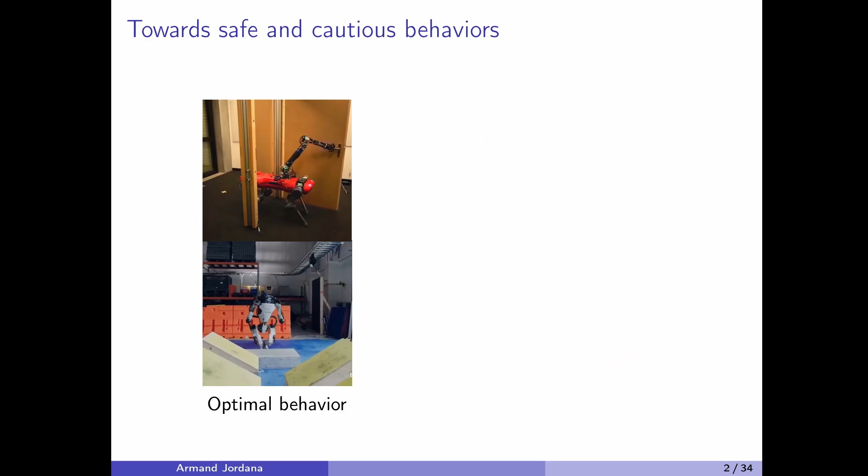In the past years, we have seen a lot of progress in robotics with our famous videos of the ANYmal robot at ETH opening a door, Atlas performing parkour. I think we can safely say that we are able to achieve optimal behaviors on a robot.

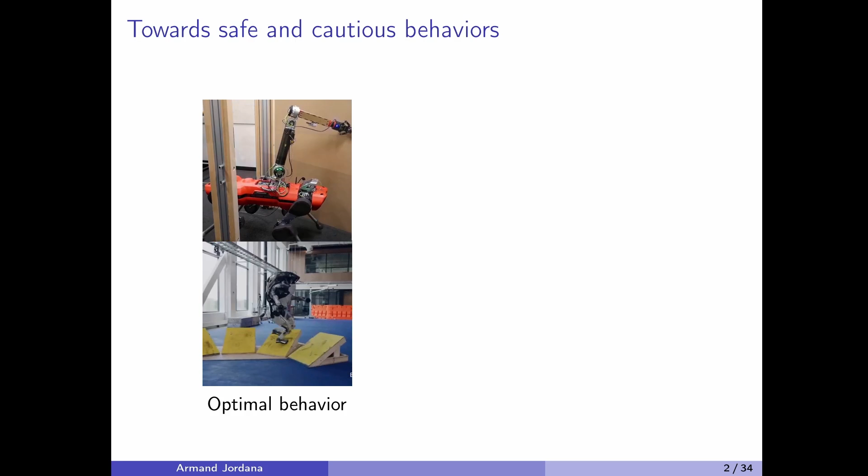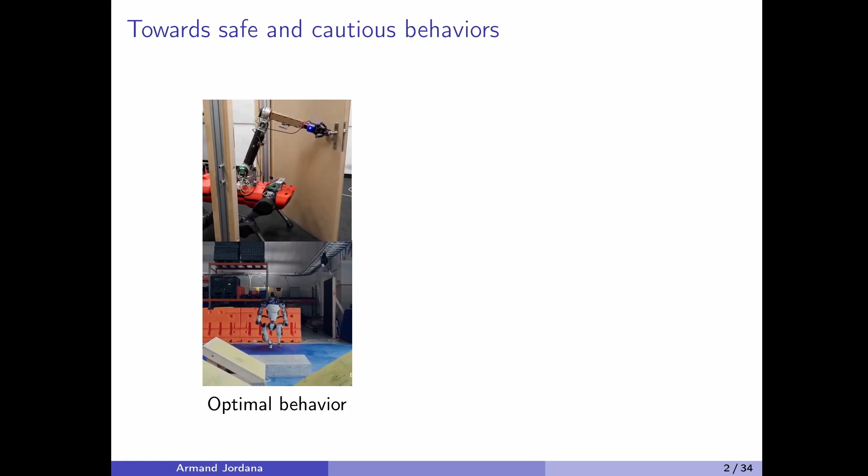And yet, this is mostly confined to predefined settings, such as factories or labs, as you can see in those videos. And I think one of the reasons why we're not seeing this outside in the real world doing useful things yet is that we are not able to achieve safe and cautious behaviors.

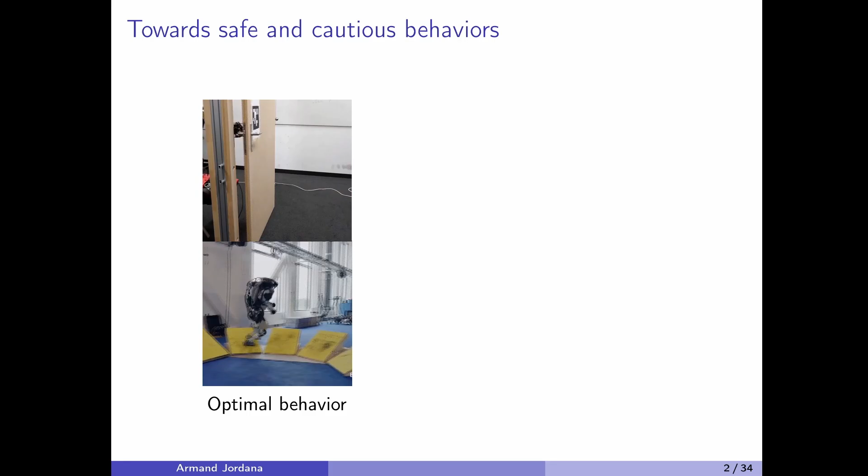And when you think about it, generating algorithms that can automatically adapt the speed or the motion according to the uncertainty and the risk is really a complicated problem. And that's what I studied during my PhD. Today I will show a few ways in which we can make progress in that direction.

So first, let's take a look at which controller is running under the hood of those nice videos that I showed you. Both of those videos are running with MPC, which stands for Model Predictive Control. The idea of MPC is quite simple: we are going to constantly replan in real time over a predictive horizon.

So if you think of this little toy robot that wants to go from its initial state to the goal, what it's going to do is very simple: it's going to plan one path from the initial state to the goal. And if something goes wrong—let's say it starts going through that path and a disturbance hits the robot—it's going to be pushed away to a new state, and MPC automatically replans a new trajectory to reach that goal.

And so what's very nice is that this new path is not necessarily the same one as the previous one. It's very versatile. You can find the new optimal thing in some sense. This is what makes MPC that versatile and effective in practice.

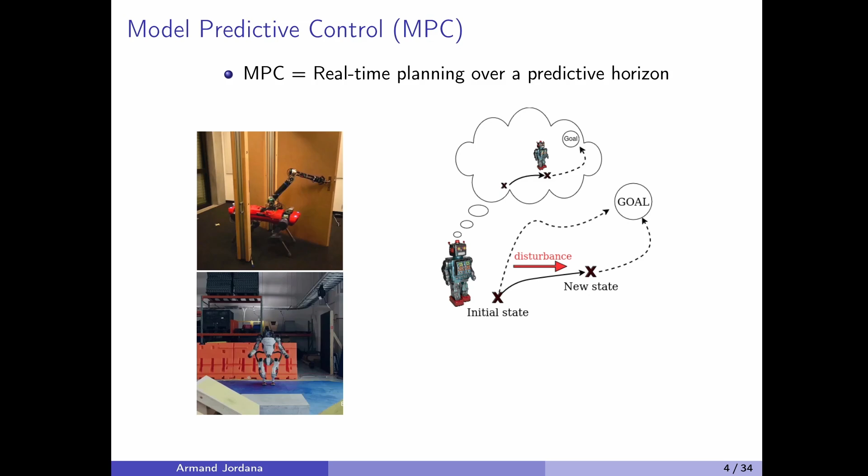However, there's a drawback: planning online is very computationally expensive, and so in practice we have to do a lot of simplifications. Usually we are going to ignore safety to save compute time, and we ignore any notion of risk and uncertainty.

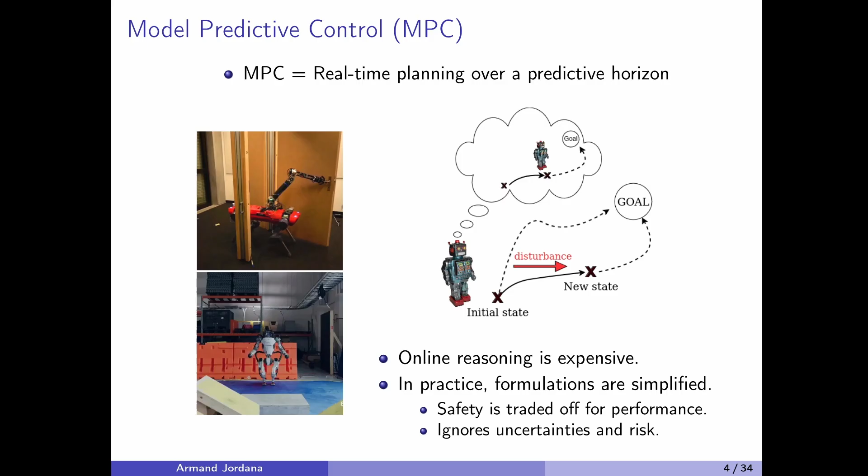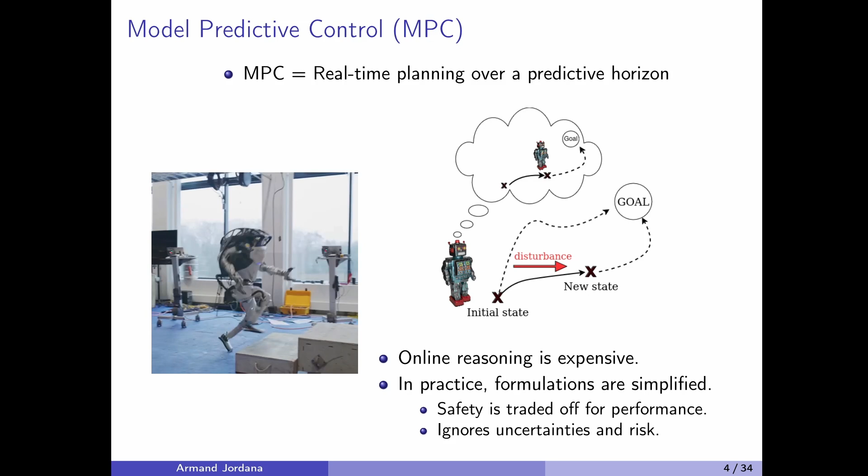So this can lead to catastrophic results. For instance, this is a famous one from Atlas where it tries to do some fancy motion and misses a step. Here, clearly, there was some uncertainty in the perception loop, and it was completely ignored by the controller, and this led to this catastrophic result.

So the question is, how can we go further? How can we bridge this gap and ensure safety while reasoning about the notion of risk?

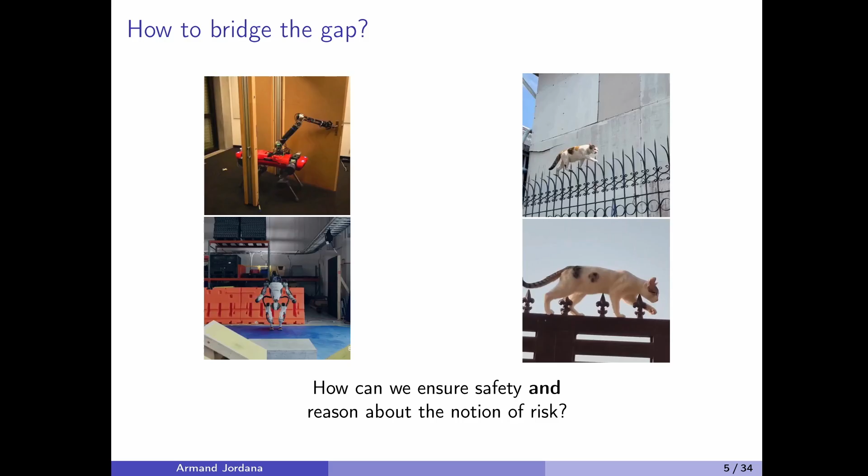Okay, so I said that this toy robot had to plan a path to reach that goal. What I meant actually is that we're going to solve an optimal control problem. This is how you formalize it: you have a state X, which in our case is the joint position of all the robot and the velocity of each joint. And then we have a control input, which is typically the torque that we apply in each of our joints. So the goal here is to minimize our cost function that's defined over a predictive horizon.

So here L is the cost function, and capital T is the time horizon.

So that's how far the robot can see into the future. This minimization of our cost is done subject to two constraints: the first stating that we should start from where we are at the initial time, and the second stating that we should satisfy the dynamics of the robot, which is nothing but the second law of Newton.

This problem is very challenging to solve because in practice, we only have 1 or 2 milliseconds to make a decision. And if we don't have an answer in a few milliseconds, then the robot falls. So it's quite difficult, especially that this problem is completely non-convex and highly dimensional.

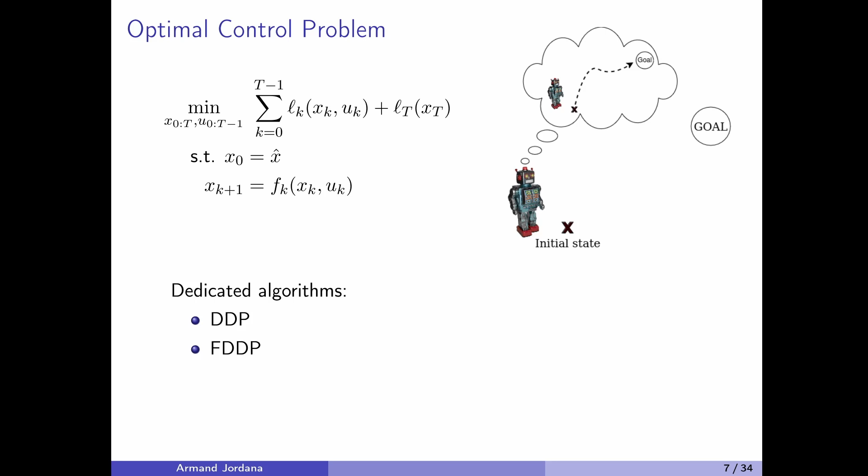In practice, practitioners in robotics have come up with very tailored algorithms such as DDP or FDDP, which is a variation of DDP. DDP stands for differential dynamic programming. This has been quite effective in recent years.

One question I asked myself during my PhD is why not use standard optimization techniques? Because in the end, this is nothing but an optimization problem. So maybe we could use Newton's method, or here, because we have constraints, some sequential quadratic programming - some really textbook techniques.

The first answer I found in the literature is that if you do dedicated algorithms, you will have a linear complexity with respect to the time horizon, while with standard optimization algorithms you can have up to a cubic complexity with respect to the time horizon. This is really something we cannot afford when we want to find a solution in a few milliseconds.

However, this is not entirely true. It's actually possible to find solutions with a linear complexity. And what I will argue today is that this has been slightly overlooked by the robotics community. It was actually well known in the control community for a very long time, but I think roboticists have slightly missed this, and I will show you how by just following standard optimization techniques we can have state-of-the-art results in robotics.

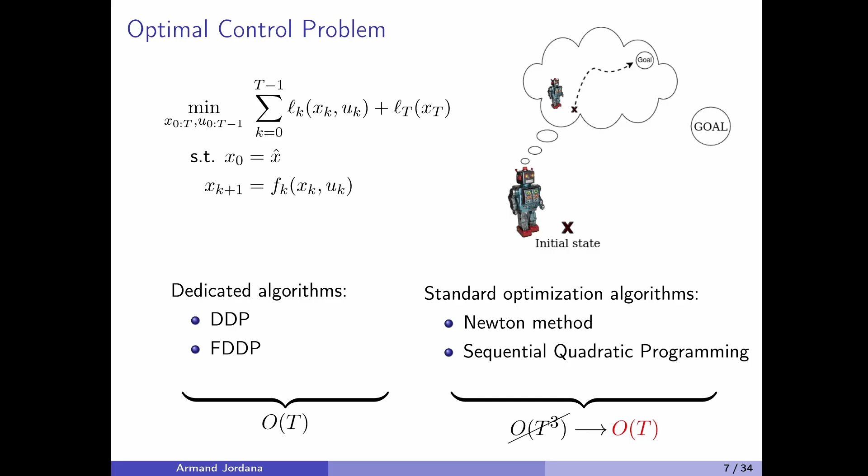Okay, so let's dive in with SQP, but we could take any other textbook technique. SQP is really a standard optimization technique to handle constrained problems. The procedure is quite simple: we are going to iteratively quadratize the cost, linearize our constraints.

Here, it's going to be the dynamics. Then we are going to solve an associated quadratic program and use the solution of this QP to take a step according to a line search procedure, for instance. So here, the challenge for us is really to solve the QP. It has a huge dimension, and this is really the compute bottleneck.

So fortunately, we are very lucky in robotics - we only have optimal control problems to solve, and they all have a very nice structure. If we look at the KKT conditions of our QP, there are a lot of zeros. It's actually a tridiagonal system that we want to solve.

And so, well, this is very simple to solve efficiently. We can just do some recursions with a Gaussian elimination, and this gives us a nice linear complexity. Actually, if you write down the equations, you can recover Riccati recursions, and this is how you can connect SQPs to all the other algorithms such as DDP. So in the end, we can implement standard optimization algorithms with really the same equations as DDP-like techniques.

Again, this was known in the control community, but not really applied in robotics. So what we did was to benchmark and see what worked best. Here you can see a nice motion with a humanoid robot, and we compare DDP and its variations against SQP.

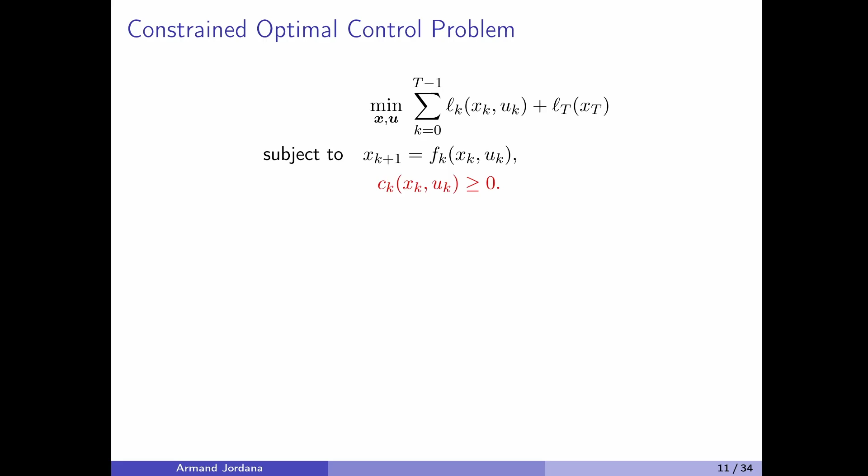However, when you come with optimization principles, adding constraints is very straightforward. You can just apply the same recipe, have an SQP, except that now you are going to have an inequality quadratic program to solve. So there is nothing new, except that the QP has inequalities, but this is something that we know how to do.

You can, for instance, use OSQP or any other state-of-the-art QP solver. In our recent work, we found a way to exploit the sparsity inside OSQP. If we look at the equations, we have the same sparsity pattern, so we can leverage it to get linear recursions and get an implementation of OSQP that's linear with respect to the time horizon.

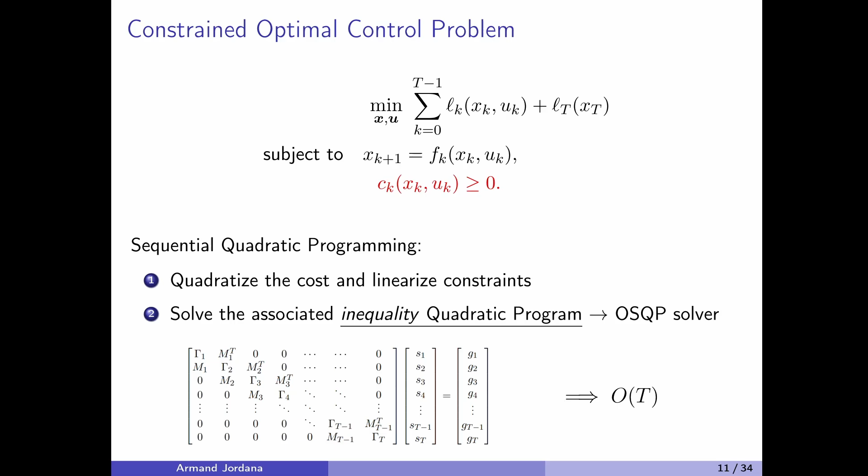If we know the sparsity in advance, we're going to do much better than the default sparse linear algebra of OSQP here. All right, so we have released an open source implementation, and since we have used this work in many other projects, I will show you just a few examples.

So here, it's a KUKA robot with 7 degrees of freedom performing a sanding task. It's basically drawing a circle while applying 50 Newton on the table.

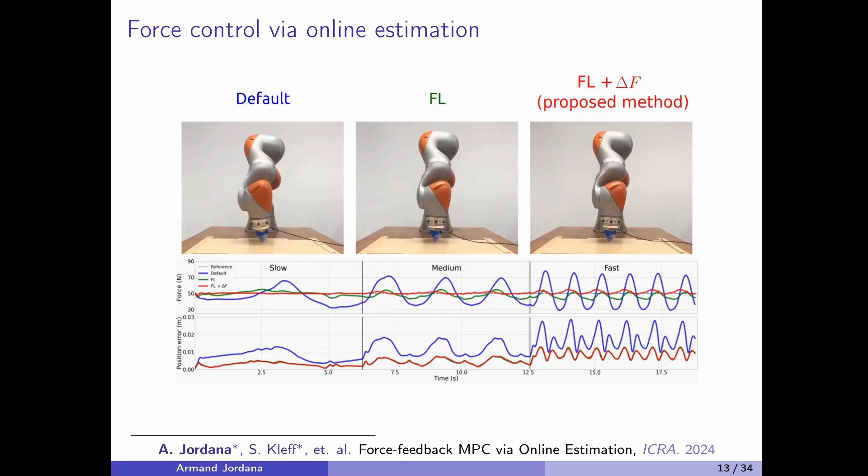So here those are various techniques. The point that we wanted to illustrate in this paper was that MPC typically struggles in a force control task. So here what you will see is my colleague pushing the robot during the motion. The first plot shows the force, and pay attention to the force tracking.

You can see that it should be at 50 Newton, but each time my colleague pushes the robot, it deviates a lot from the static reference. This is a well-known problem from MPC. It's basically due to the fact that we don't integrate the force in the state.

So here we propose a very simple way to circumvent this problem by doing some online estimation, nothing different than Kalman filtering. As you can see, now each time my colleague pushes the robot, we're able to match the 50 Newton reference in force.

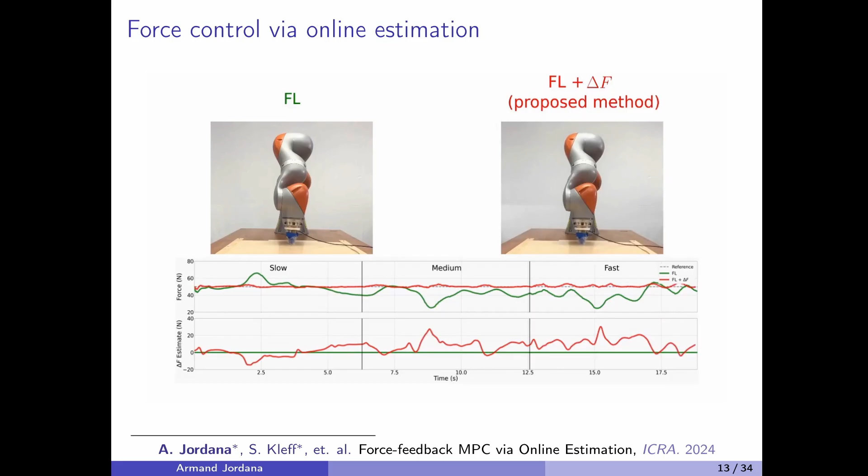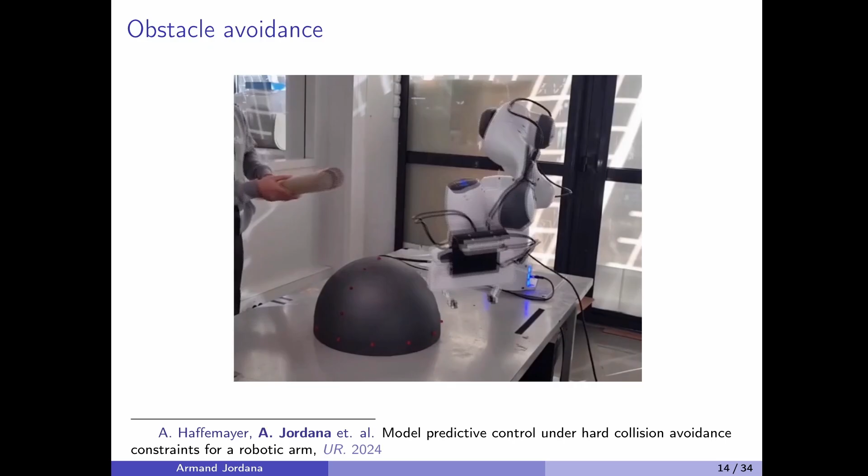Okay, so that's one example of application. Here's a second example of application that was performed here at LAAS. This is a Panda robot that has to avoid this spherical obstacle.

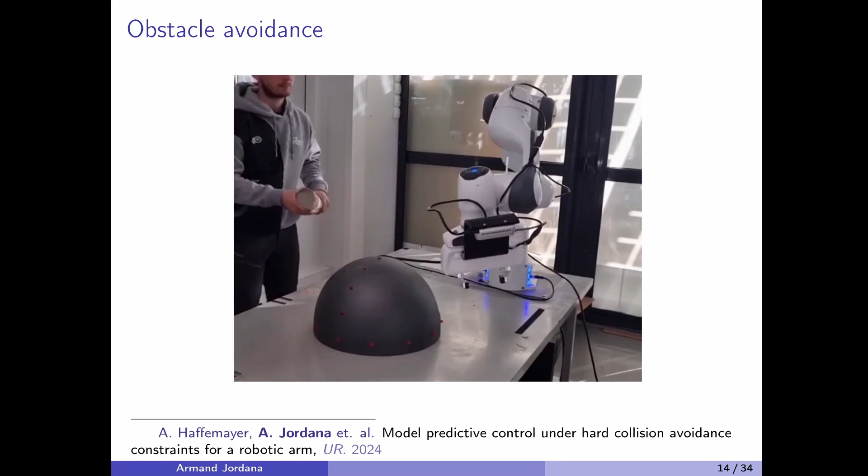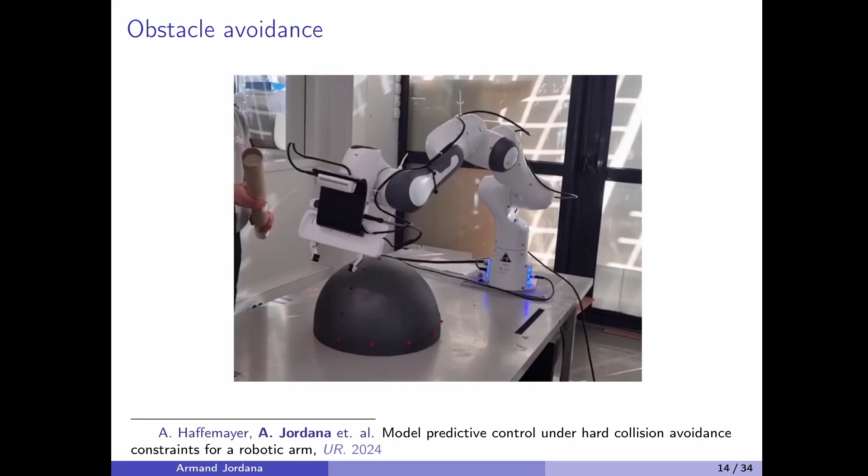Here it's a very highly dimensional problem because we are defining the obstacle avoidance as a set of constraints between each part of the robot and the sphere. So we have as many constraints as we have parts of the robot, and we are solving this within 1 or 2 milliseconds.

Okay, so then we can always do more to please reviewers and combine everything. So here's an example. Those were the first demonstration of MPC with hard constraints solved at this kind of frequency on a torque robot. And you can see that it works well.

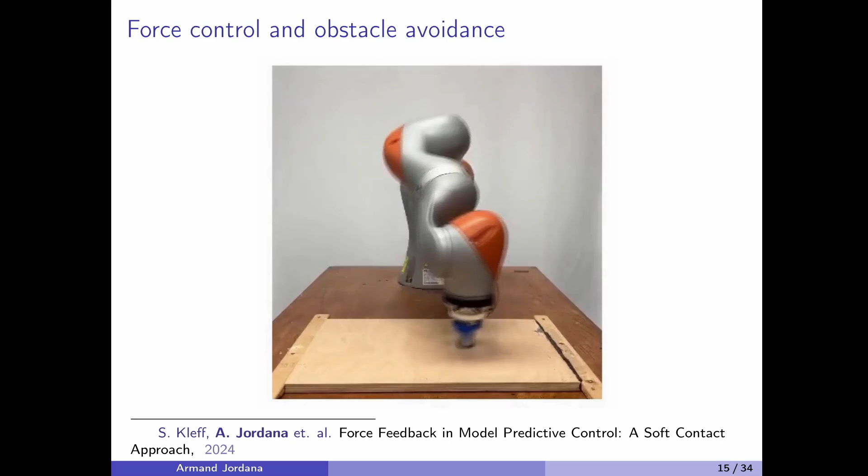So you have a hard constraint that states that the robot should not collide with the obstacle, and then the soft constraint, the cost function that says that we should follow the circle. So of course, if you put the obstacle in the way, it cannot achieve the task.

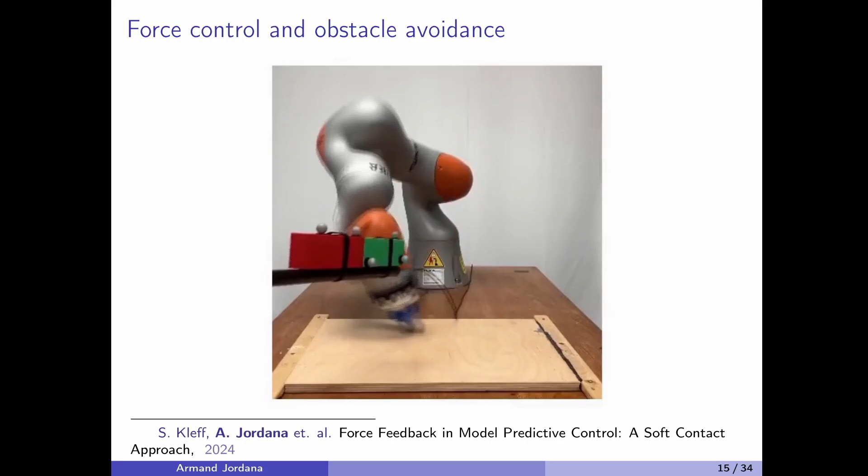Okay, so now I want to show you a small limitation, actually an important limitation. So here, this is a pick and place task. It's a simple task where we want the end effector of a robot to go from one green dot to the other green dot.

As you can see, we placed a rod, a black rod, in the middle. And now the robot is not able to go from one point to the other. We are stuck in a local minima.

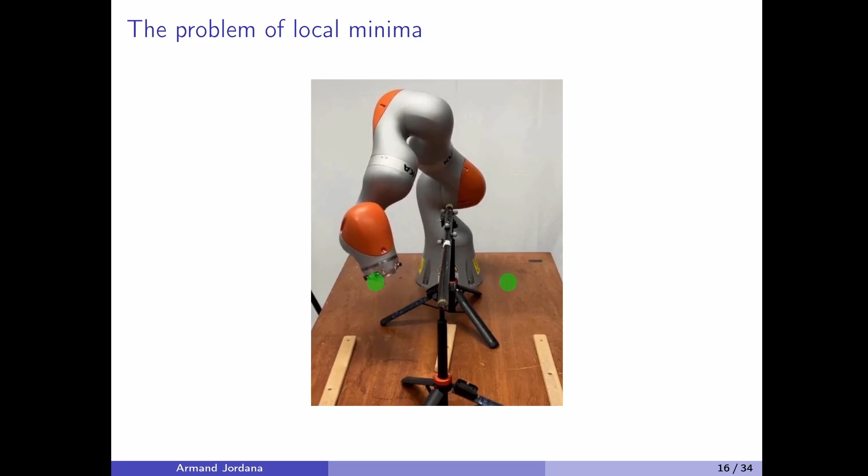This can be due to multiple reasons. It's a common problem of gradient-based techniques. And so I will present a few ways that can help us mitigate this problem.

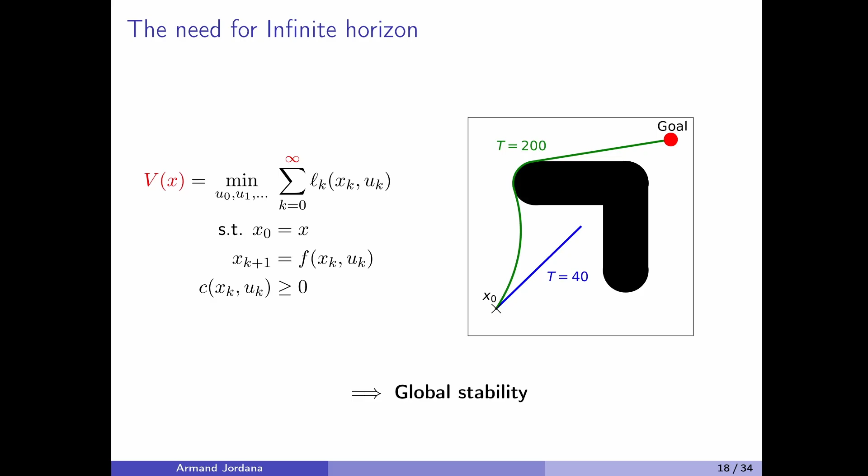So ideally, what we would like to have is this infinite horizon value function. This has been well studied in the theory of MPC in the 90s mostly. And what you can show is that if you follow this, you can have global stability, meaning no matter where you start, you will reach your solution. However, all this theory is for linear systems, and in practice, our functions are nonlinear. So we need to rely on some form of approximation or learning, and this is what we did in this project.

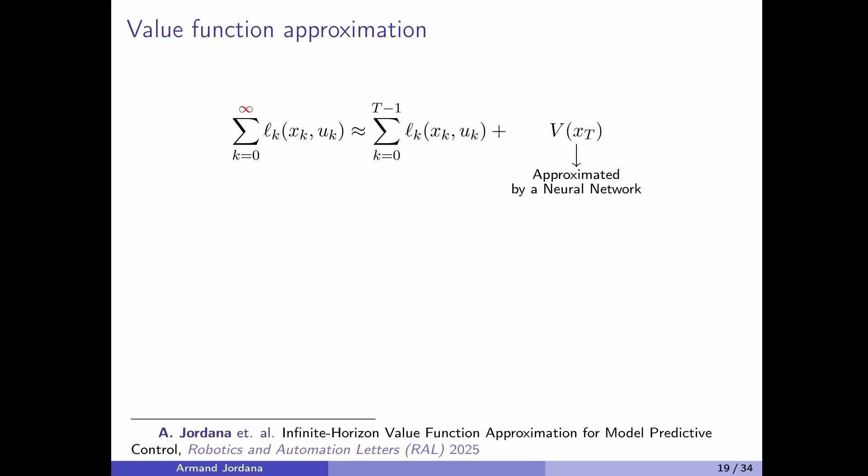So here what we do is very straightforward. We have this infinite sum, and we decide to split it into two terms. The first term is the model-based term, so it's the finite sum, and the second term is a neural network that approximates the infinite horizon behavior. This is really classical concepts from reinforcement learning, except that now we have constraints.

So we can still use reinforcement learning techniques such as minimizing the Bellman error to do the training, but now because we have constraints, we need to apply hard constraints when we do the minimization when we have a Bellman error. But this is now something we can do with the solver I introduced earlier.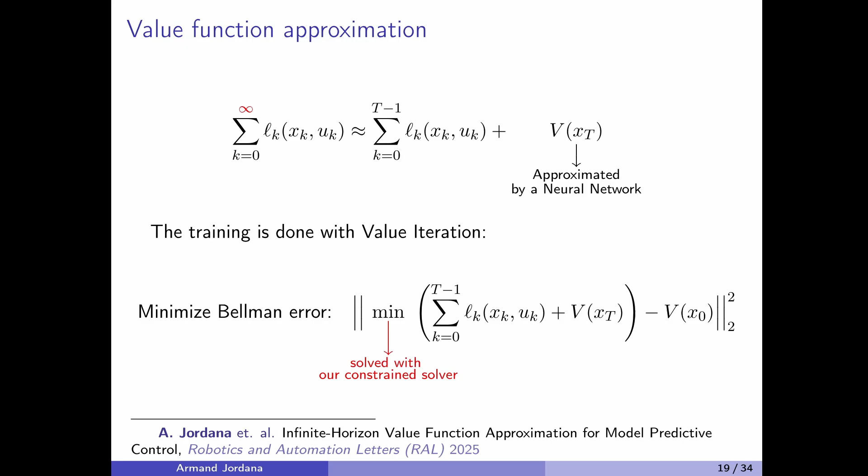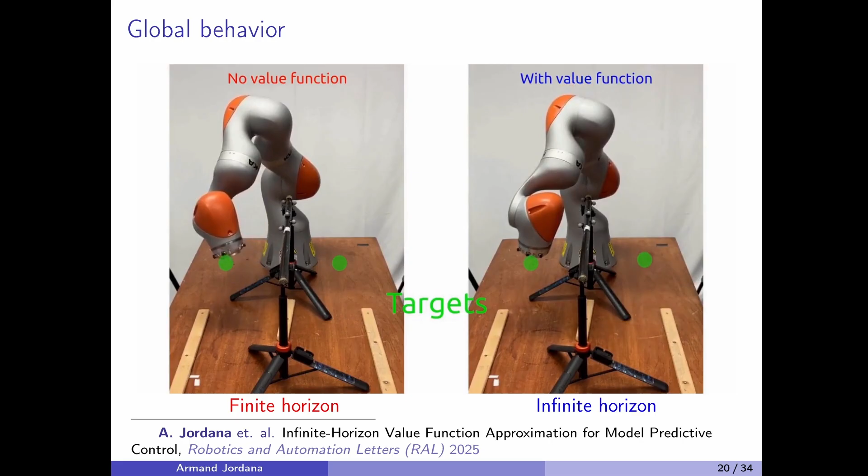And once we have trained this value function V, we can deploy it and see that now we are able to get more global behaviors. So here the only difference is really that the terminal cost is this learned value function. It's only a one-line difference in the code. And now you can see that it's able to avoid nicely the obstacle.

So the same thing can be done by moving the goal around. We can also move the obstacle. It's very generic. And one thing that I want to insist on is that this, in my opinion, is a very principled way

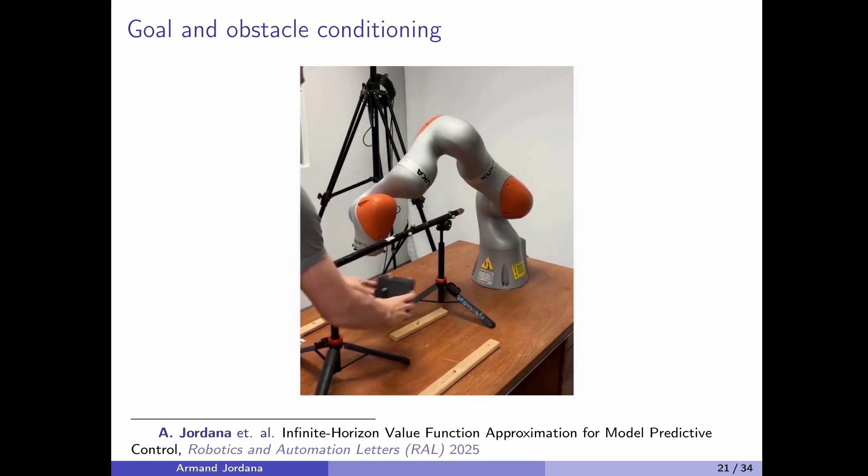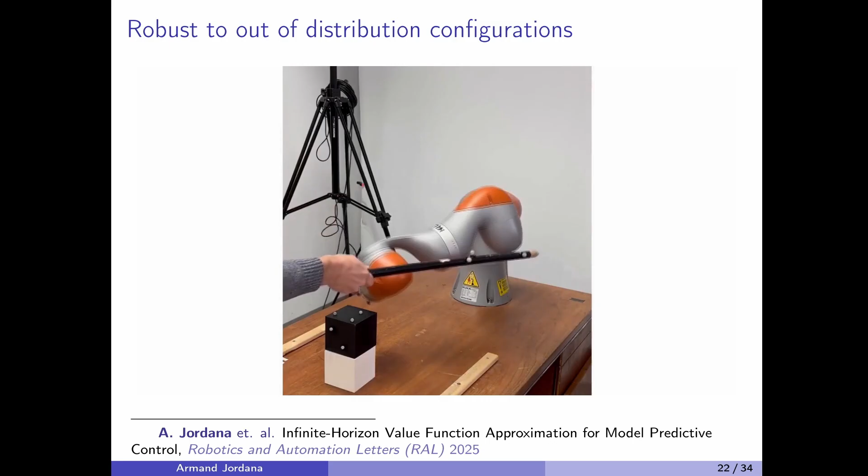to have safety when we have a learning module on a very real robot. Here, for instance, I show you a configuration of a rod that has never been seen during training. And so you can see that nothing explodes. The value function is surely giving random numbers because it has never been trained on this configuration.

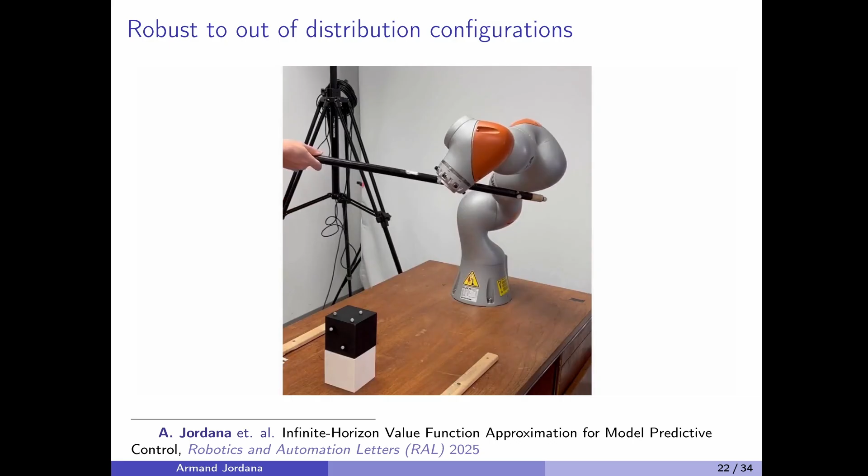And yet, the safety is guaranteed because we are not colliding with the rod, since the constraints are applied at each time step. As you can see, it's maybe not optimal. It's not going to find a way around the obstacle, which makes sense because it has never seen this during training, but at least it's safe. So I think that's a very interesting way to combine learning with model-based techniques in order to have safety during deployment.

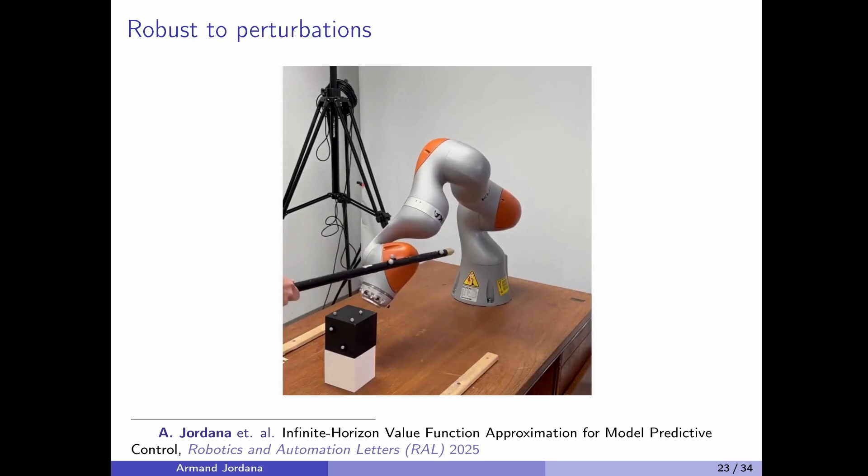So this is another example where I push the robot against the table. It has never seen such perturbations during the learning, but because I have a constraint stating that I should not be too close to the table, it's able to resist, basically.

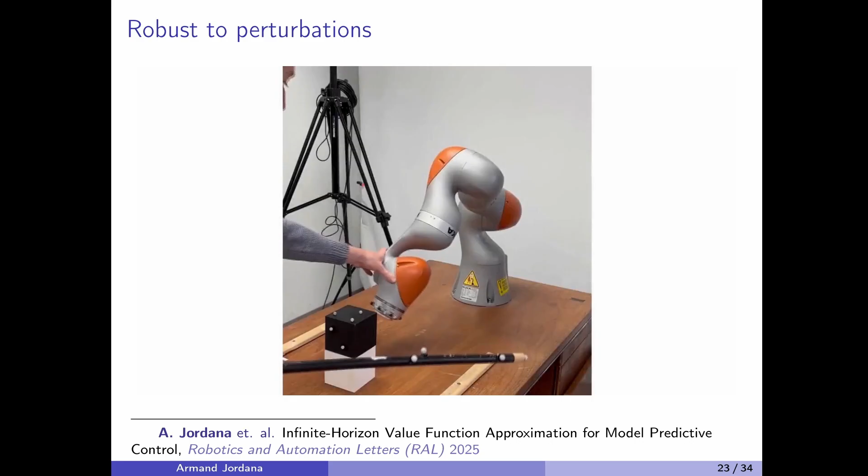Okay, so this concludes this second part of the talk. Now I want to talk about contact. In my first videos of this talk, I showed you humanoid robots, quadrupeds, that are constantly doing contact switches with the ground or with the objects they manipulate. Gradient-based techniques are usually not a very good choice for this kind of problem.

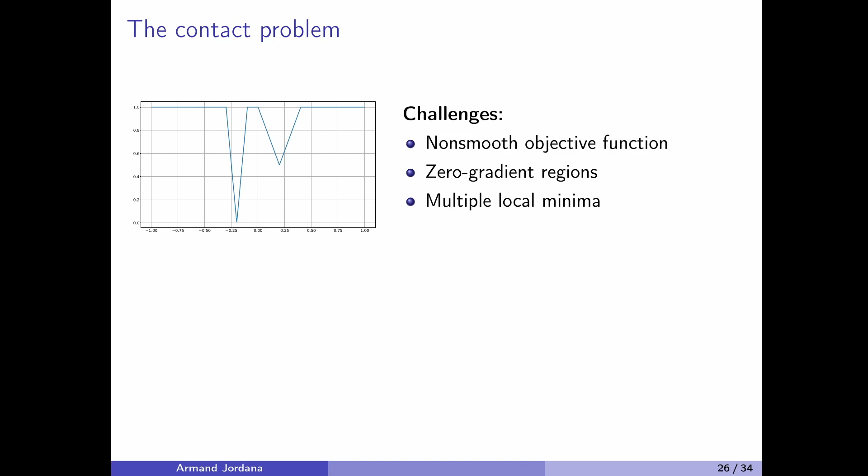So one idea that is getting more and more popular these days in robotics is to use zero order or derivative-free approaches. Here are a few examples: we have CEM that is quite popular, CMA-ES, and recently MPPI, which I think is only very well known in the robotics community, is gaining a lot of traction. I want to explain a bit more of this because I think maybe there's some nice things hiding behind this algorithm, which is now more and more used in practice on robots.